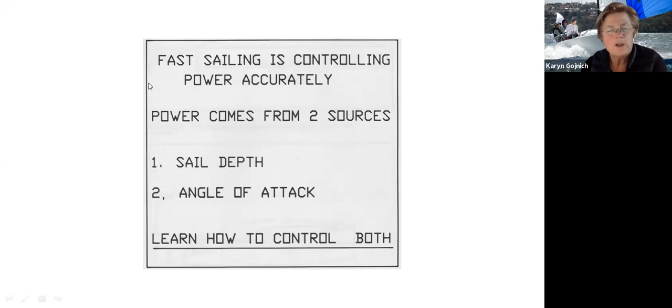So what I've tried to do here, and I did this quite a few years ago, is to try and pigeonhole the things that change the boat's performance. And the big saying is, fast sailing is about controlling power accurately.

Because it's different to the normal things we do. When you drive a car, you want some more power, you put your foot down. And these days, if you need a bit more, it changes gears and does it automatically. But when you get on a sailing boat, you set the sails up, but then the power is controlled by somebody up in the sky. I've never met him, but I know he's got a bad sense of humour, because as soon as you get the boat set up and you're flying, you think, oh, this is fantastic - all of a sudden he changes the wind strength. And you've got to change the power by changing the shape of the sails and trim and all that stuff.

Because what you're trying to do is keep the boat accurately at an angle of heel. And that's the big pointer as to whether you're controlling the power accurately or not - how steady your angle of heel is. You're controlling that with your steering and with your trimming.

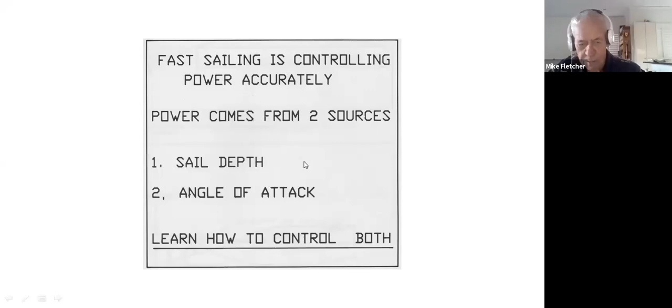When I had the 29er squad that I'd worked with for a couple of years, every time I said in the morning, 'good morning, boys, where does the power come from?' they'd all yell out, 'sail depth and angle of attack.' And that was the greeting. So that's how we want to start thinking about things.

Hang on till I get... now I can see.

And just before we go any further, I wanted to talk about vectors. I don't know how many people would do science in their studies at the moment. A vector is an arrow showing a force that has direction and magnitude.

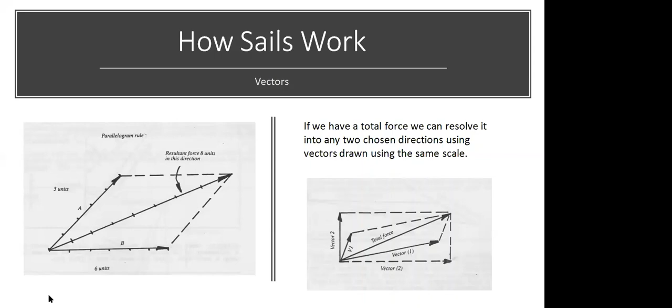These forces are Newton's laws of motion. They're controlling the things that happen to your boat. And he's saying when forces are in equilibrium, so this force and the one across the middle are all established and they're in equilibrium, the body that they're pushing on either stays motionless or it moves at a constant speed.

So the thing that's controlling or stopping this thing moving is drag. If this was a cardboard box sitting on the ground and you put these two forces on it, it may not be enough force to overcome the drag of the box sitting on the table, and it'll stay stationary. But if the forces are big enough, if you increase them from 5 units to 10 units and this one from 6 to 12 units, all of a sudden the drag on the box will be overcome, and it'll start to move.

Now, as it moves, the drag goes up until the forces get in equilibrium again, and then the box will move at a constant speed. So see what we're getting at here? It either stays stationary because the drag's too high, or it accelerates to a point where the drag becomes equal with the forces that are acting, and then it starts to go at a constant speed.

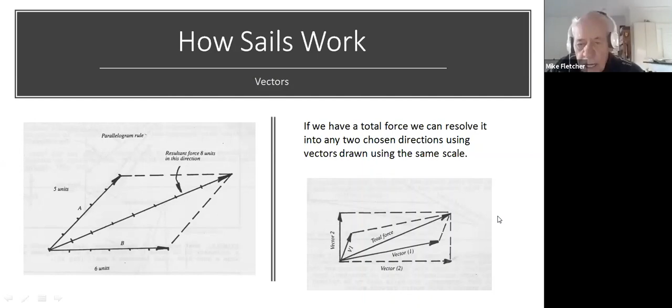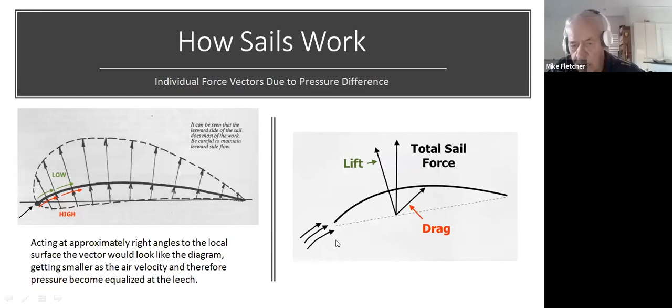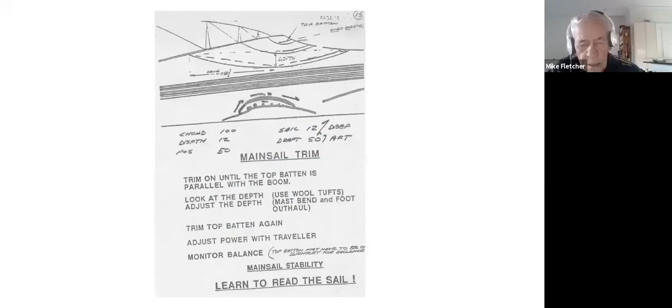Now this is just a lift and drag diagram. So what we're going to do now is change that into something... hang on, I'll get back here... can't get what I want... I don't know where this drawing is. Anyway, we'll talk around it.

So just going back now to where we were - the power comes from sail depth and angle of attack. So we'll look at sail depth. How do we define it and how do we control it? The depth of a sail is measured as a percentage of the chord length. So most sails, like dinghy sails, are 12 to 14% deep.

And the position of the draft, whether it's forward or aft, has a big bearing on the efficiency of the sail. It's measured as a percentage of the chord length again, and measured as a percentage back from the leading edge - okay, so this is the mast up here.

So then the next thing we've got is mainsail depth. Hang on. Now, how do we control the mainsail depth? The sail is designed by the sailmaker and has depth built into it, like seam shaping, and that depth you can't change because it's built in there.

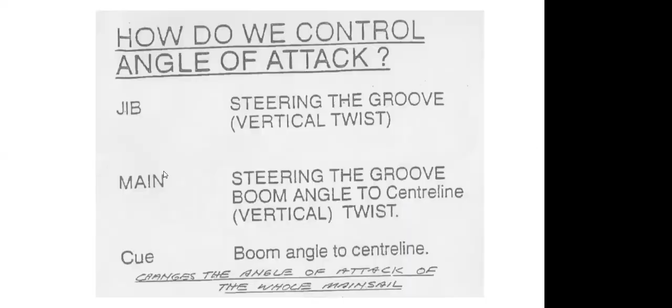Fletch, I'm just going to interrupt you there and remind everyone that they can unmute themselves and ask a question as we're going along. We've got some young sailors with us and they might not have heard the term apparent wind before - do you want to explain that?

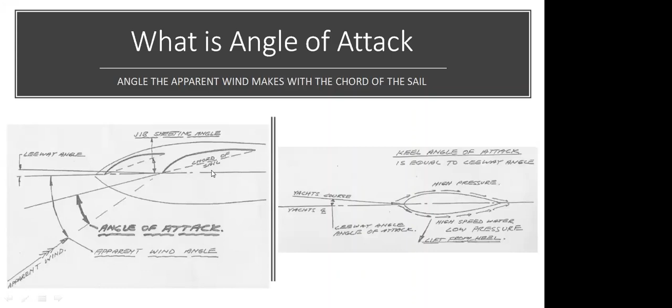Yeah, the apparent wind is the wind that you feel, and because your boat's going forward at say 5 knots, the boat speed induces apparent wind. So if you're sitting in your car and there's no wind and you put your hand out the window going 5 knots, you feel 5 knots of wind. What the boat's feeling is the boat speed added to the true wind, and that's the apparent wind speed that the sail sees.

When you get into bigger, faster boats like the 100-footers that go to Hobart, they're sailing upwind doing 12 or 14 knots, so that adds to the apparent wind speed. When they're sailing upwind at 14 knots in 15 knots of wind, they're sailing in over 30 knots of wind speed, which is a lot of wind.

So as you guys get to start hiking in your laser, because your boat's going faster, you're getting more wind across the sail due to your boat speed. So that's what you feel as apparent wind - it's that simple, it's just the boat speed added to the wind speed.

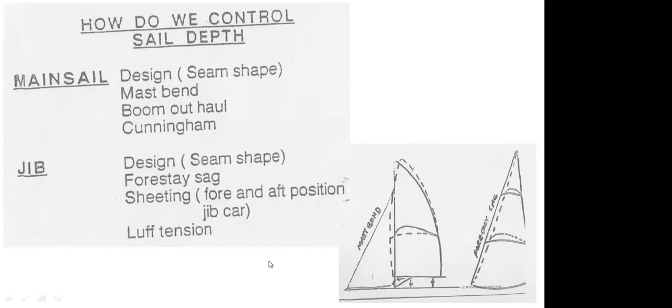I've been talking about this stuff for years, and sometimes you have to hear it half a dozen times before you get a handle on it. So don't worry about asking a question - we're all in this together. Some people think, oh, I won't ask that question because it makes me look like a bit of a dill, but it's not - we're all a bit dillish when we first hear this stuff.

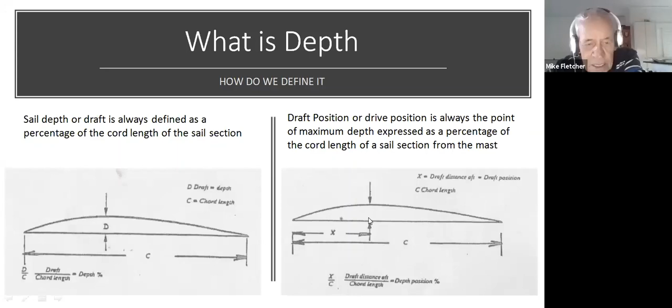So we've all got a handle on sail depth, draft position fore and aft, how to control the sail depth. Mainsail, four things, the seam shape that's designed in, so we don't have to worry about that. Mast bend, boom outhaul, Cunningham.

And that's because you guys, the laser sailors only have to worry about one sail. That pretty much happens automatically in an unstayed rig. But then the boom outhaul and the Cunningham, that sort of stuff, they're the two critical things you've got to worry about in a laser radial. It's the boom outhaul and the Cunningham.

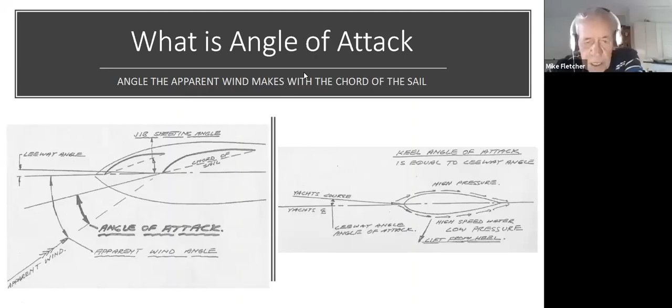The mast bend is all to do with the mast stiffness, the tubes that are stuck in the deck, and how much they bend. And the sail twist, which we'll talk about in a minute, that's also automatically controlled in an unstayed rig.

So one of the big depth controls on the laser radial is how hard you pull the sheet on, because that's what's bending the mast. Does everybody get that?

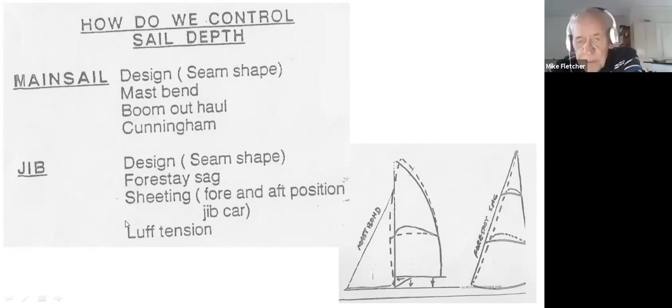Some of these other sketches we've got here is this one on twist, so that a mainsail, when you're using it in stronger winds, it twists open as you go up the sail. That's sort of the middle thing, and you see the chord here is way further open than the bottom of the sail, and then it's more open up here.

So as you go up the sail, the sail's getting less and less powerful because you've got twist in the sail. So the sheet pressure is also controlling it.

So if you had a sail looking like this one and you sheet it on, all these angles here would come in closer to the boom, and the top of the sail would power up, and you'd feel a lot more power acting on the side of the boat.

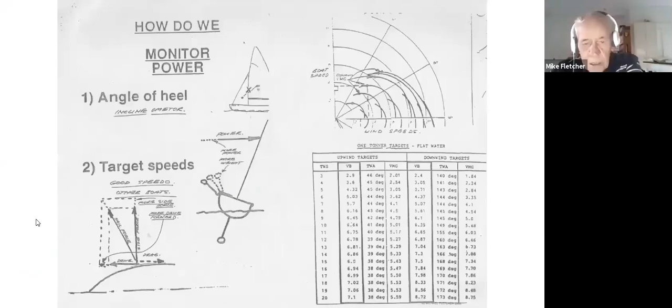And the next thing is the sheet pressure - see the angle we're looking at onto the centre line. This is a boat with a jib, like a 420 or 470. This is a laser radial that's only got one sail. So as soon as you go to the opties, their boom points right over the corner of the boat - that's the right spot. What I do when coaching little boats like this with juniors is get them out sailing, get the sail looking really good with the boom pointing over the edge, and the boat sailing along nicely.

Then I say, don't move the sail, and I lean into the boat and put a black texta colour mark on the mainsheet where it comes through the snatch block. So when you say we're going upwind, they pull it straight to that mark, and they're not reaching around with the sail not pulled on hard enough. Then you teach them to ease it a bit in the gust and pull it on a bit in the light spots, using the mark so they can see how much they're pulling it on and off - they learn very quickly where it should be.

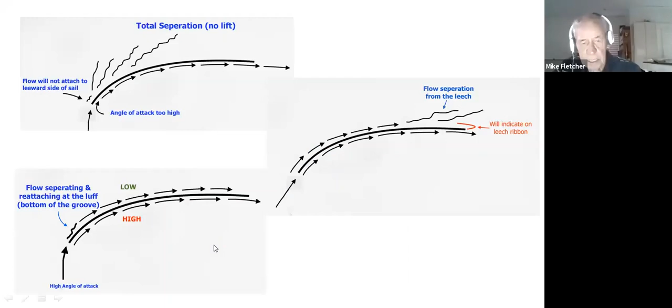So if you want a little more power when you ease the boom, you just tighten your vang a bit, and it changes the twist. But when you need full power, you sheet through the vang, and the twist comes out completely.

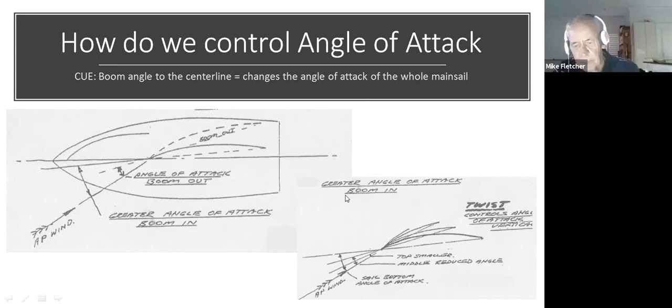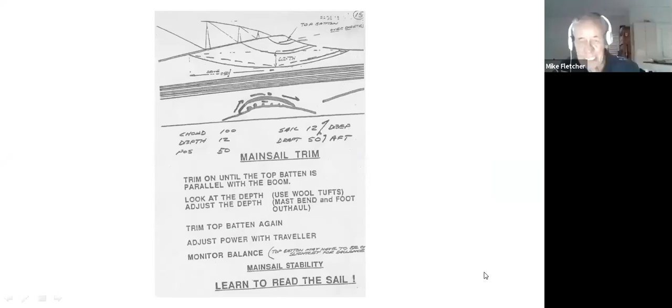Okay, does that give you a bit of a clue on what we're talking about? And here's the main sail that is showing twist. I'll show you this on a diagram here. This is a photograph of an Etchells sail.

What we've done, you take the photograph from down here, halfway along the boom, up on the windward side of the sail, and the stripes that are on the sail at half height, three-quarter height and quarter height, you can draw the lines. Once you've taken the photograph, you draw the lines across the sail like this and measure the depth. So when you look at the photograph like this, it shows the twist and the depth as the sail depth up and down the sail.

This has got - I haven't got it here - but there's a scale on there, and it shows the twist at 1, 2 and 3, and it reads the angle of twist and all this stuff, and it's done in the computer. So once you get this photograph in the computer, if you've got a program, it just reads it and comes up with all these measurements. So that's what we're looking at when we're talking about twist.

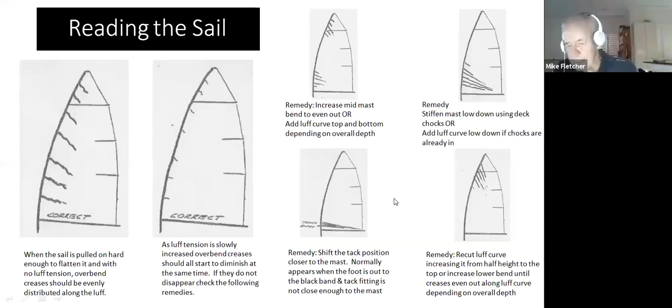It's something that you see on a dinghy, and we used to photograph them, and we used to photograph the Finn sails to get the depths of the sails right. And I mentioned before, when you sheet a sail on, the load that goes down the leach is really critical, because if it's too hard, when a gust hits it, it doesn't have any resilience, it doesn't move. You want the leach to just move a little bit like this automatically without changing anything. And it's really critical in an unstayed rig.

So the Finns realised that this load here was really critical. So they have a piece of wire that's the same length as the leech of the sail, and they have a spring balance put in it. So they hook it onto the boom, and they sheet the sail to the deck, and the scale on a Finn, it mostly reads about 5.5 kilos. And if you're a big guy and you've got plenty of righting moment, then you might be able to carry 6 kilos on the scale. And if you're a bit light, you might only get 5.25 kilos. But this load that's up here is critical.

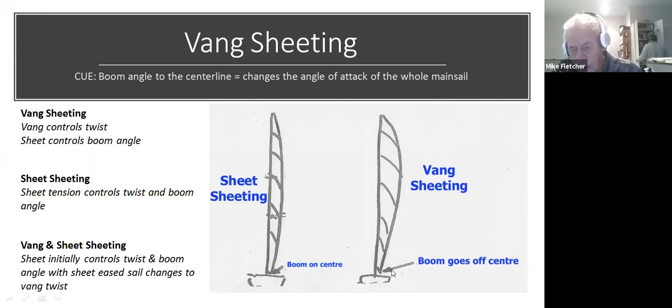And with a Laser Radial sail, because your boom hits the deck here, it's automatically controlled. But when I was coaching them for the Olympics, I actually had one of these wires with a gauge in it and hooked to the boom, so we could pull the boom down block to block and read the gauge.

And in those days, they were aluminium extrusions, and some were softer than the other. And they just had a massive problem with the performance of the boat, because if you've got a soft top section, the sail would go much flatter in the top than somebody who had a stiff one.

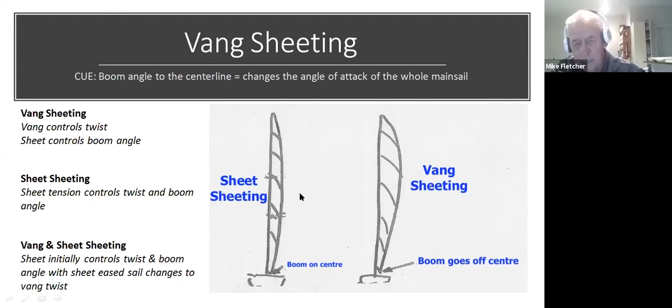So if you were sailing in moderate conditions, they'd just burn you off. Now they've got carbon top sections. I think that's happened to try and control that.

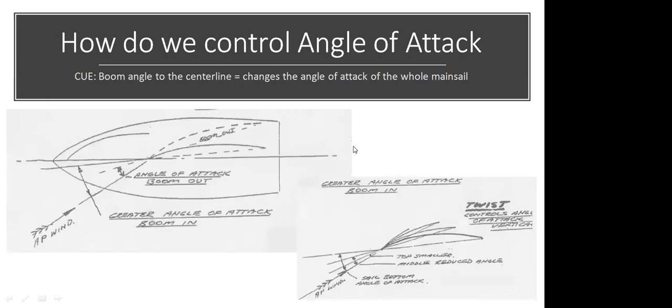How are we going? Any other questions? I think it's time for us all to stretch our legs. There's quite a lot of information there to digest, and as Fletch said, you hear it one time, then you hear it again, and it does take a little while to digest.

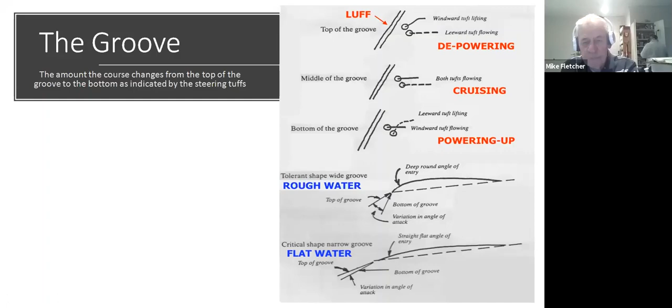When I'm coaching, I'll mention these things. Like you've got too much load in your main sheet leech, and that means you've got to get more Cunningham on or something like that. So it's important to eventually have a good grasp of what we're talking about, and you don't have to think about it when you're sailing. You just automatically do it, and if the boat feels bad, you just glance up and say, where does the power come from?

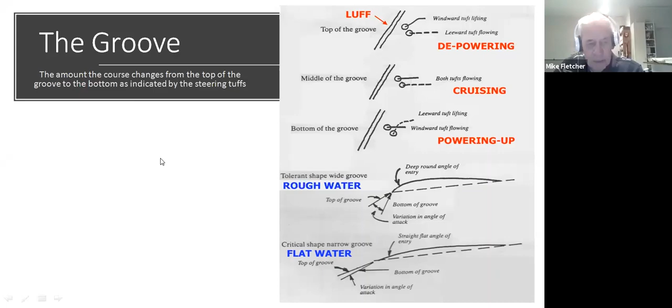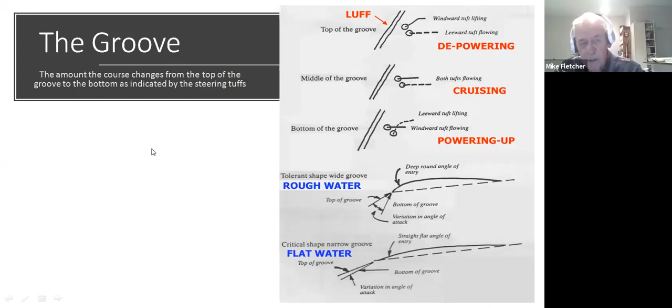Sail depth and angle of attack. What's the depth like? It's too deep. How do we flatten it? We bend the mast more. So you just get to the answer with your speed problems. You get there really quickly because you don't get muddled around with the Cunningham and the outhaul and all these things. You just think quickly into what controls depth, and you come to the answer straight away.

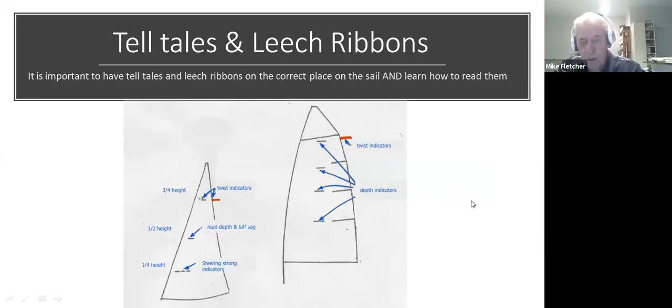Any other questions? I think it might be easier for a lot of our guys to learn while doing as well, which would be great to have your feedback on the water, Mike. Yes, and that's why I do the lectures, because when I mention something out on the water, you'll have a good handle on what we're talking about. Can visualize it for sure.

I know a lot of laser sailors mark where they want their ropes to be for different wind strengths and that kind of thing. But is it better to start off, if you're starting off as a laser sailor, by just looking at the sail and then adjusting to the shape of the sail? Or is having markings on ropes good too?

The best thing with a laser is the fact that your blocks are very close together, and you've got to get good at just glancing back and knowing that they're like a hand width apart. And sure, in this wind strength, when I'm just hiking and I'm looking for a bit of power, I want them about 2 hand widths apart. So when you glance back there, that's what they should look like. It's easy to judge that distance because it's a small distance.

And then as you feel the pressure going up, you need to flatten. So you sheet a bit harder, and you might go down to 1 hand width. And then when you get to the stage you're fully hiking and you need to depower, then you use the Cunningham and you get block to block. And then the next thing is I need to get rid of some more power. Then you're fully bang sheeted. So when you ease the sheet, it just goes out.